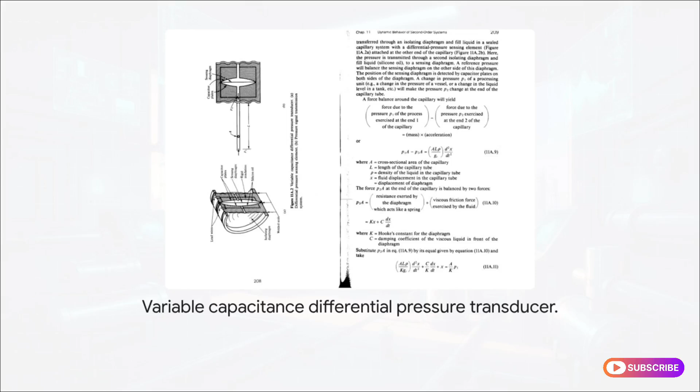And what you're looking at here brilliantly illustrates the base solution, the variable capacitance differential pressure transducer. Inside this sensing element, you've got capacitor plates that detect the absolute tiniest shift in a flexible isolating diaphragm. I mean, when fluid pushes against that diaphragm, it moves a fraction of a millimeter. The capacitor plates pick up that minute change, which gives us a highly accurate reading without ever actually exposing our internal electronics to those harsh, corrosive chemicals.

What that diaphragm is actually doing is, well, it's basically solving a math equation for us. Hydrostatic pressure is essentially our cheat code here. By calculating the pressure difference between the bottom of the vessel, which we'll call pressure 1, and the top of the vessel, pressure 2, the math infers the exact liquid level. It's simple, it's super reliable, and it keeps the plant running safely.

Section 2. The displacement float concept. Now, let's look at the stark contrast between these two approaches. When I say the word float, you probably instantly picture a beach ball bobbing up and down on the water. Actually, scratch that. Totally erase that from your mind. A standard float rides the liquid surface and moves up and down. But a displacement float, it is a completely different beast. It's heavier than the liquid, and it is largely stationary. As the liquid level rises, it doesn't bob up. Instead, its actual buoyancy changes.

To really grasp this, think about taking a heavy, completely sealed metal pipe and shoving it straight down into a swimming pool. You're holding it firmly in place, right? As you push it deeper, or let's say as the water level rises around it, you can physically feel the water pushing back harder against your hands. The pipe itself isn't moving, but that upward force is changing. That is exactly what is happening inside the industrial vessel.

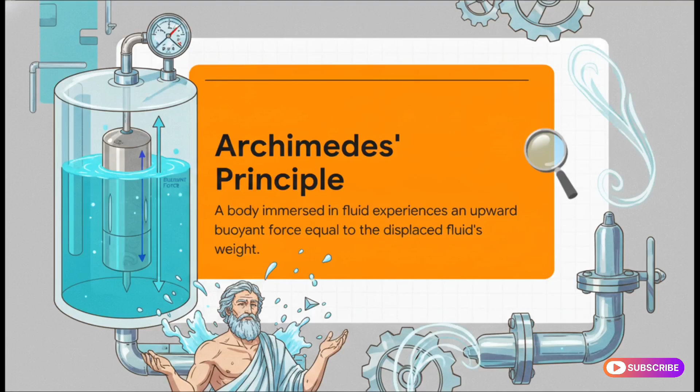Moving right along to Section 3, how displacement floats work. You might vaguely remember Archimedes' principle from high school physics, but here it's not just a textbook definition, it is a vital, everyday industrial tool. A body immersed in a fluid experiences an upward buoyant force equal to the weight of the fluid it displaces. In our heavy, stationary displacer, we use this exact principle to measure the effective weight loss of our float as the liquid climbs up its sides.

Okay, here is the exact mechanical sequence you absolutely need to know. First off, the displacer is fixed in position. Second, the liquid level rises inside the tank, covering more of that heavy displacer. Third, because of Archimedes' principle, the displacer loses effective weight. It essentially feels lighter to whatever is holding it.

And finally, a mechanical spring or a torque tube linkage connected right to the top of the displacer detects this tiny, tiny change in force. Which brings us to Section 4.

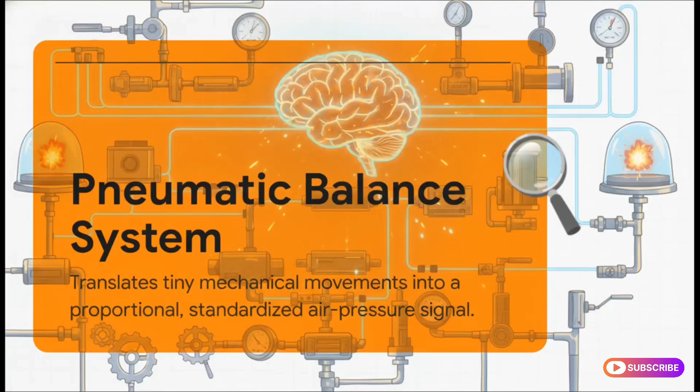Enter the pneumatic balance. So, let's dive into the climax of our mechanical evolution here. How do we automate all this data without using a single drop of electricity? We use a pneumatic balance system. Think of this as the brain of the analog operation. It acts as a translator.

It takes that raw, tiny mechanical force from the displacer spring and translates it into a plant-wide communication system using nothing but compressed air. And this is absolutely crucial in hazardous environments where even a tiny electrical spark could cause a massive explosion. So, you're going to want to lock this specific industry standard number in your head for sure. 3 to 15 psig, or pounds per square inch gauge.

Whether you're standing in a massive refinery in Texas or a high-tech chemical plant in Germany, this is the universal air pressure range used to talk to valves and controllers across the facility. Generally speaking, 3 psig means 0% level, and 15 psig means 100% full. Section 5. Translating mechanics to air.

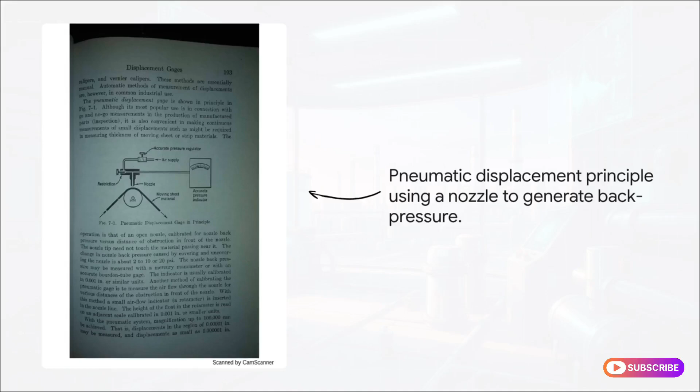Now check out the sheer genius of the flapper and nozzle setup we've got here. You have a constant air supply coming in through a small restriction. That air just bleeds out of a tiny nozzle, but when our mechanical linkage moves a flapper, basically a little obstruction, closer to that nozzle, it blocks the air from escaping. This immediately creates back pressure behind the nozzle.

Let's string the whole shebang together into a perfect causal chain. This is gold for your exams, by the way. Step 1. The liquid level in the tank rises. Step 2. The stationary displacer loses effective weight. Step 3. The connected spring reacts and pulls the mechanical linkage.

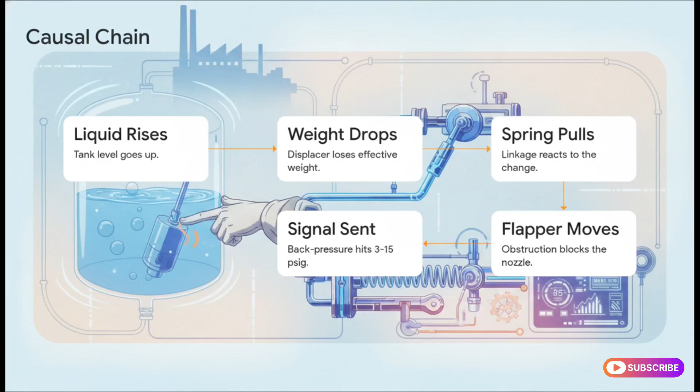Step 4. That linkage moves a flapper closer to the pneumatic nozzle. And Step 5. Back pressure increases, sending out a beautifully proportional 3 to 15 psig signal all the way to the control room. It is a seamless chain of physics.

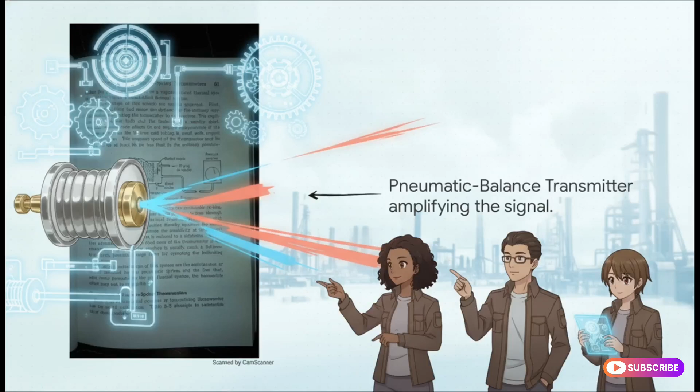And this brings us to the final piece of the puzzle, the pneumatic balance transmitter. See that tiny change in back pressure from the nozzle? It's not quite strong enough on its own, so we route it directly into a bellows system. The bellows essentially acts as a pneumatic amplifier, taking that tiny pressure change and giving it the real muscular volumetric force needed to blast that 3 to 15 psig signal hundreds of feet across the plant to operate heavy mechanisms.

Ultimately, that air signal is going to hit a control valve, and engineers have to make a critical, high-stakes choice here. Do we use an air-to-close or an air-to-open valve? This choice is based purely on safety. If it's a cooling water valve for an exothermic reactor that could overheat, you definitely want an air-to-close valve.

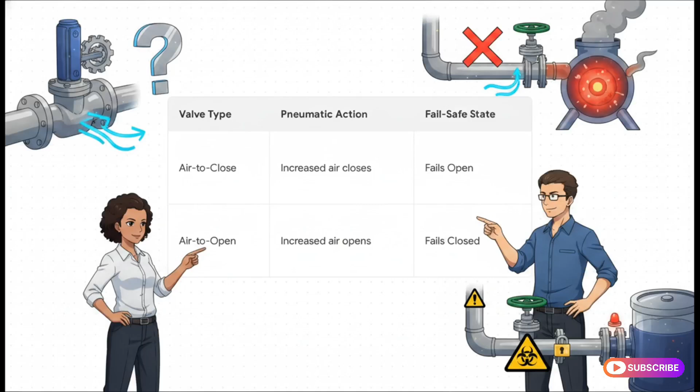Why? Because if the plant loses instrument air, the mechanical spring forces the valve to fail in the open position, instantly flooding the reactor with cooling water and preventing a meltdown. On the flip side, if it's a toxic chemical feed, you absolutely want it to fail closed to trap the danger. Which leaves us with this final, really provocative question to think about.

If the industrial plant suddenly loses all compressor power, what happens to your fully automated pneumatic level control system? Does the whole process spiral into a catastrophic meltdown? Or do those brilliant mechanical fail-safes take over and save the day? As you review these systems, always ask yourself exactly how your control valves are designed to fail.